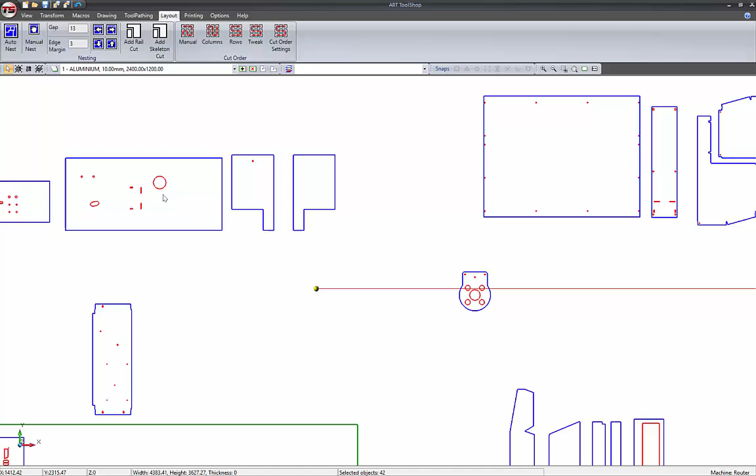So there we have all of the parts. Remember from the last tutorial that we set ToolShop up to automatically perform the cleanup and combine functions on import. As you can see, there are no open path indicators and all of the internal shapes are red, indicating that they are a child of the external parent shape.

We can easily select parts and drag them, as we've learned previously. You can do this by either clicking on the lines of the shape, or you can drag a box around the part. Once you have selected a part, you can drag it by the center handle.

If you want to constrain the part to move vertically or horizontally, or at a 45-degree angle, simply hold down the Shift key while dragging it. This activates orthogonal mode. A good way to remember this is that Shift and straight both start with S.

If you want to rotate the part, simply drag the rotation handle. You can also hold down the Shift key while rotating the part, and it will be constrained to 45-degree increments. Using these tools, you can arrange the parts on the sheet to make better use of the material. But surely there's a better way?

Let's take it one step further. ToolShop has a really cool feature called the manual nesting tool. You'll find the manual nesting tool right here on the layout toolbar.

Notice that there are two settings beside the manual nesting button. These control the gap between parts and the margin around the perimeter of the sheet. We know that we'll be using a 6mm router bit for this job, so we'll set the gap at 10mm. Let's also give the job a 10mm margin around the edge of the sheet.

When I activate the manual nesting function, you'll see that the button toggles on, and you'll see a tick on it to show that the function is active. To use the manual nesting function, simply click a shape and drag it into place.

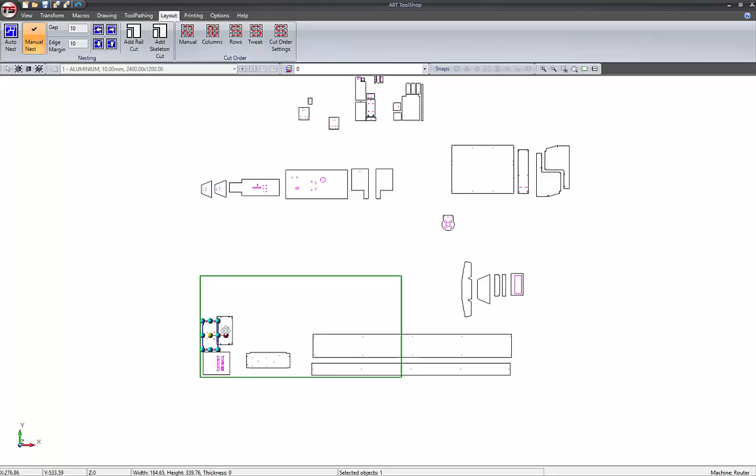Manual nesting behaves much the same as the regular select tool, with a couple of big differences. When you drag a part with the manual nesting function active, you will not be able to drag a part within the margin allowance that we set before. In this case, it's 10mm, or around 0.4 of an inch.

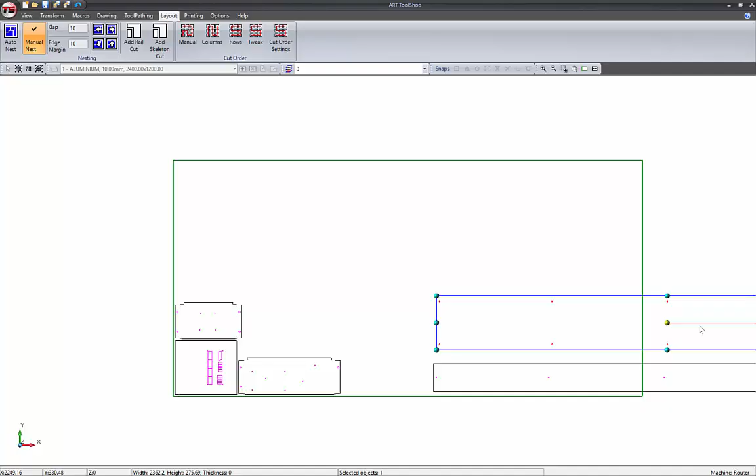Once you position the first part, you can continue to drag and rotate other parts so they fit around it. Notice that the gap between parts is maintained according to the gap setting above. Remember, you can use the Shift key to restrict the rotation increments to 45 degrees. This may be useful if you need the part to be cut in a certain orientation because of grain in the material or some other reason.

Notice that there are also 4 arrows on the toolbar. Clicking one of these buttons will move a part as far as it can go in that direction, while still obeying the gap and margin settings.

If you select a part with the manual nest tool, then hold the Shift key down, you can also use the arrows on your keyboard to do the same thing. This makes it very fast to manipulate a lot of parts. I'll skip forwards to the end of the sheet.

Notice that we have run out of space, but we still have some parts left over. Let's add another sheet to the job. First, I'll need to exit the manual nesting tool by toggling the button off.

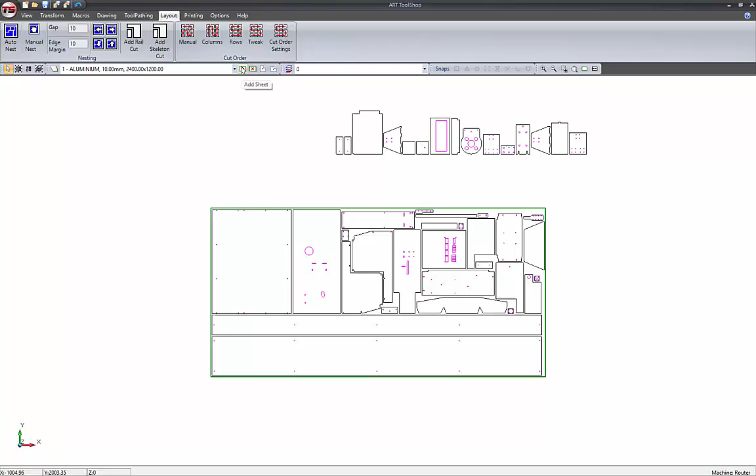On the toolbar, you will see the current sheet of material listed in the drop-down list. All I need to do is click the Add Sheet button to the right of the material description. ToolShop will bring up the material selection box with the current material selected by default. You can enter a custom remnant size here, or just click OK to add a second identical sheet to the job. I can change between sheets from the drop-down list at the top.

A little shortcut I use is to hover the mouse over the material description and then scroll the mouse wheel. This quickly scrolls through the available sheets.

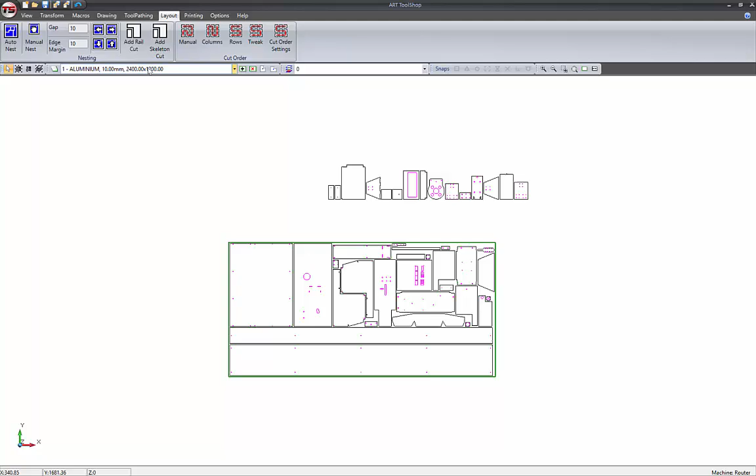But how do I get the parts to the second sheet? First of all, select the leftover parts and right-click. In the pop-up menu, we can use the Move to Sheet option. Simply select the second sheet and the parts will jump to that sheet. You can then go back to that sheet and continue to manually nest the parts.

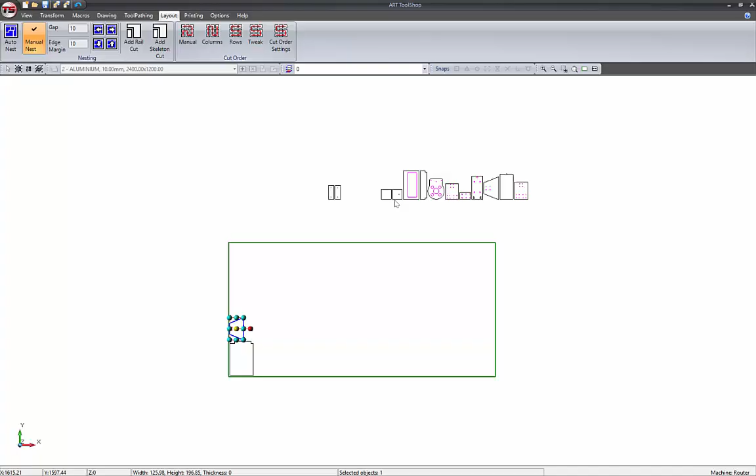When it's time to output the job to the CNC machine, ToolShop will create an individual G-code file for each sheet. So that's how you use the manual nest functions in ToolShop. We hope you're really starting to get an idea of how to use ToolShop and its simple but powerful features. Come back next time to learn how to use the automatic nesting function.